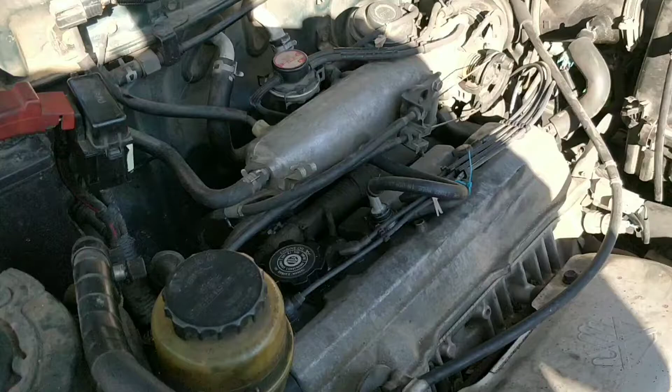Real quick, this car's gone a lot of miles and years ever since I changed the timing belt. Previous to that, because of the other problem it had, I've just had no power—no power up hills, no power down hills, and no power in the accelerator. You got like the first quarter inch, and that's all the noticeable power you have when pressing down the accelerator. Everything else you push down was just going in order to engage the transmission to downshift it.

So I don't really know how to explain it—just no power anywhere. And my cruise control is really wonky too. I'd engage it, sometimes even after my fix on the timing belt. Even on this last trip, before my alternator went out on me, I was having issues. I'd put the cruise control on and the car would floor itself. Other times I'd put it on and it would go down halfway and I wouldn't have any power. I don't know, it's just really hard to explain, but just no power at all in the engine.

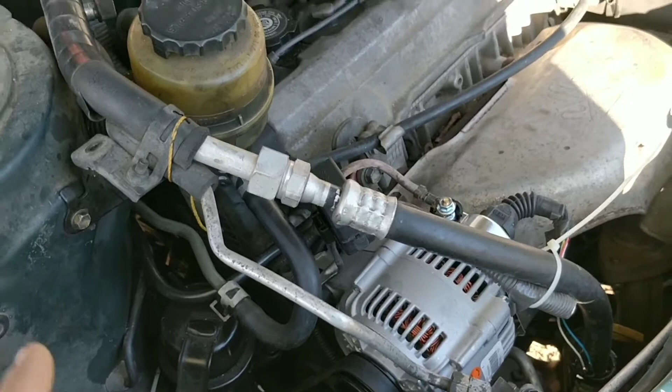So some things I want to go over so I don't forget. Like the timing belt—one of the common problems with people replacing their timing belt, and you'll see people mention it, this is what happened to me 150,000 miles ago, was I was a half tooth off. You get your timing belt back on, trying to put it back on the pulleys and everything, and then you're a half tooth out of whack. I had to make a decision on whether to go left or right to make it sit correctly, and I went the wrong direction, which ultimately put my crankshaft one tooth off, which made everything 15 degrees out of time, or at least down at the crankshaft it was 15 degrees.

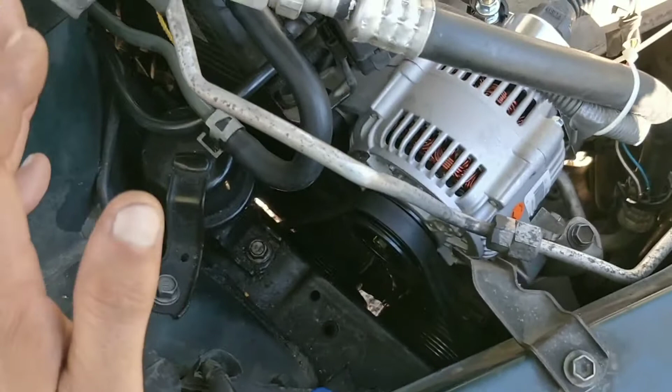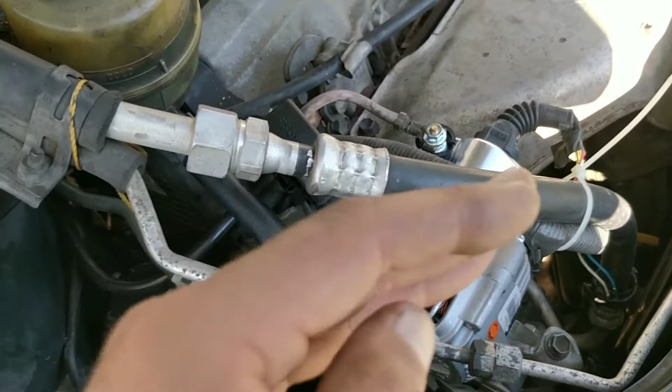Another thing—mark your belt. You'll need to get a Q-tip, cut off the cotton swab end, dip it in some paint, and touch the belt on each side of the tooth, and then touch the tooth, so you'll have 3 dots, and that way you've got your original position. Of course you do all that on the camshaft pulley. Then the crankshaft pulley, down there, has a little V notch on the back side. And on the timing belt cover, on the lower cover, there's 0, 5, 10, 15 degree marks, and on the other side there's a 45 degree mark.

What else is there? I guess that's it. If I think of anything else, I'll mention it. All right, so to check your timing—I don't know if a timing light will work. You check it and point it down here, where you can see little things and the light would flash. But as soon as you start your car, the computer puts it out of time, so I don't really know if a timing light would work on that.

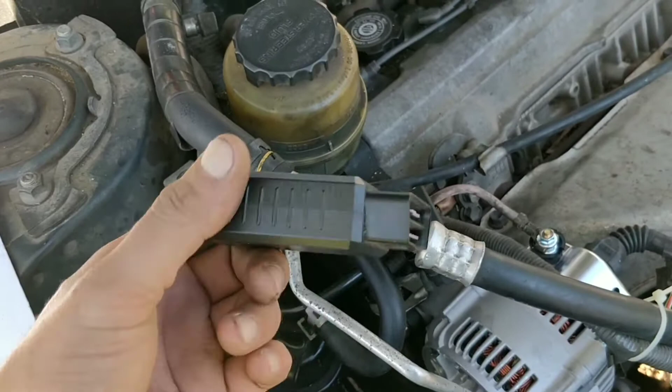Or maybe you can get one of these—I got one of these. It's 15 bucks, I've had it for years, and it's just awesome. You plug it in and you can see everything going on with your engine, and also whether it's advancing or retarding the timing, and how far out of time it is. So maybe you need one of these with the app to see where it's at, then go down there with the timing light to make it flash, and maybe they'll line up. I don't really know, but the way I did it, everything was already taken apart since I was changing out my timing belt preventatively this time instead of waiting on it to break.

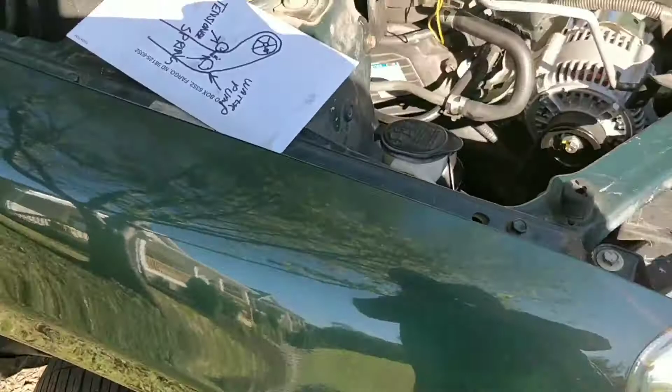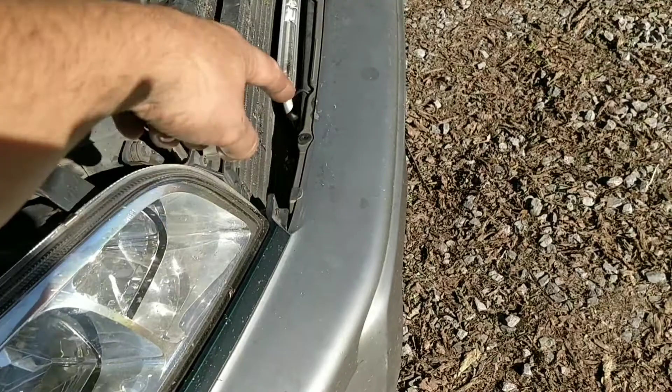Well, screw it, let's just get into it. So you jack up your car, take off your tire, and there's plastic skirting that goes around to protect everything. There's 2 ten millimeters here, and I believe 4, maybe 5 ten millimeters there, and one goes in at the end. In the middle there's like 2 bolts. That'll take it off and expose the crankshaft.

You'll need a breaker bar or a ratchet with a cheater bar, especially if you're doing it alone. You'll need an extension on it because you'll have to use your foot, and a 19 millimeter wrench. Everything else is 10 millimeter and 14 millimeter. Once you get your tire off and stuff, you come over here and take off this reservoir, and you need to get your power steering pump out of the way.

There's 2 bolts, one here and one here, and that'll loosen that up. I didn't do this, but I wish I had, because it was such a pain and it was so messy. Then you follow this around, and there's 2 more bolts - whenever you see how hard it is to get to those, you'll understand why I didn't do it. You take those off, and that'll just lift off and flap out of the way. What I did was disconnect it here, leave this here in the way, and take zip ties and plastic, but it was constantly dripping because of gravity. This thing has air holes in it, so it's always wanting to drip. So you got that out of the way.

Next thing you need to get out of the way is your engine mount. There's 3 bolts on the damper right here, one here and one on the other side. You'll get that off, and then on your engine mount itself there's a bolt on this side, a nut on this side. You'll take those off, and underneath in the middle there's another one. Once you get that off, your engine is completely disengaged from the car on this side.

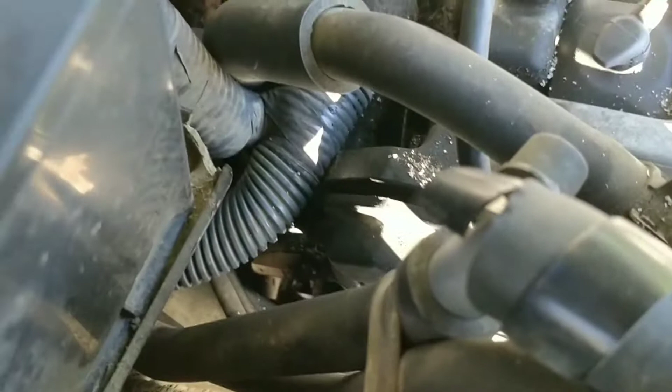Then on this side - where's that? You can kind of see it right down there, there's a 10 millimeter bolt. And then the last one, you go on around and down, and where the engine mounts are, you sit your hand in - it's like a 1.5 inch recess. You put your hand in and feel around, and you can feel that last bolt. So you get those off.

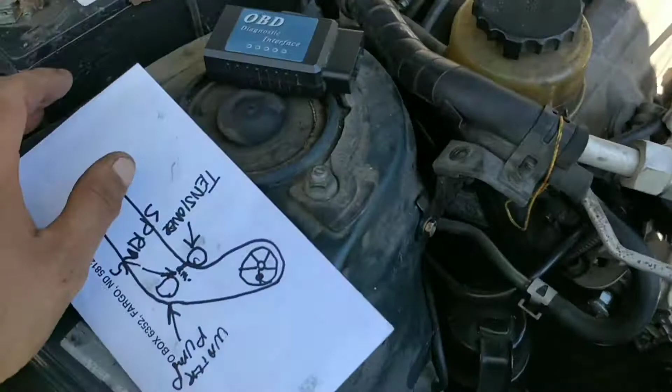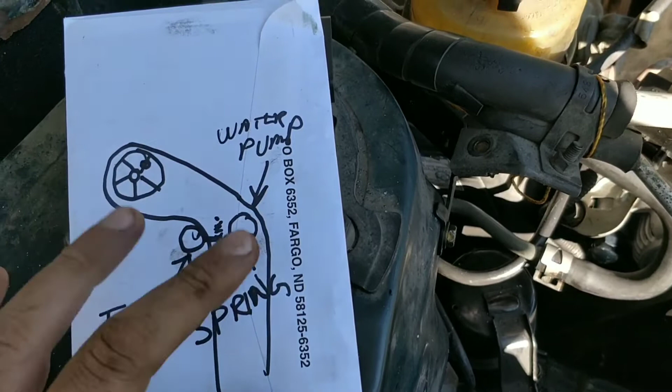And once you get those off, that'll explain this - my awesome, artistic drawing here. You've got the camshaft pulley here, water pump here, your tensioner, and the spring. Then down here there's a couple more pulleys and stuff, and then your crankshaft. It's really important that you never let the slack off of the bottom, okay?

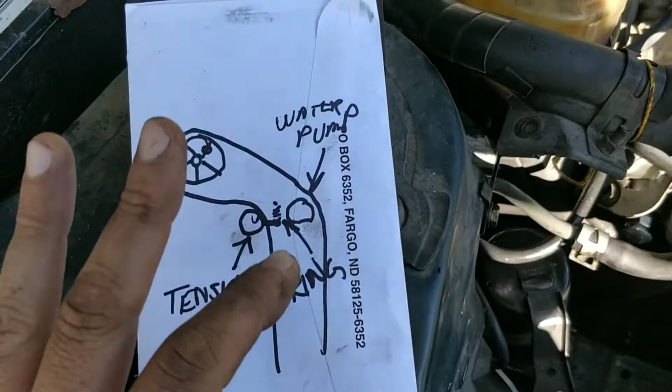So, first let's talk about timing. You put your crankshaft on top dead center. It takes 2 rotations of your crank to turn your cam once. There's a little hole in the sprocket, and on the engine they stamped a square in there, stamped into the engine. So you'll need to stick something in that hole to find it.

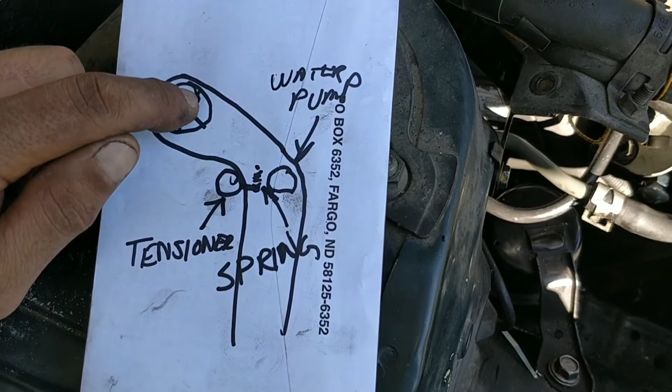Now, top dead center, just so you know, is go up 90 degrees and then back about 5 or 10 degrees, and that's where that notch is. So you need this hole to actually be over here, and when it's there, you should be in good shape.

Put your crank on 0, have your hole up here, put your drill bit in the hole and press in, and then either use your foot with the cheater bar on the crankshaft, or get another pair of hands in there so they can spin it. You'll want to spin it 10, 15 degrees each direction, and then you'll find that little notch - when you do, you know your cam's at top dead center, okay?

So then once your cam's at top dead center, look at your crank and make sure that little notch in the pulley is sitting at 0. Mine, from where I was off, was sitting at 15. So yeah, I screwed myself for a long time.

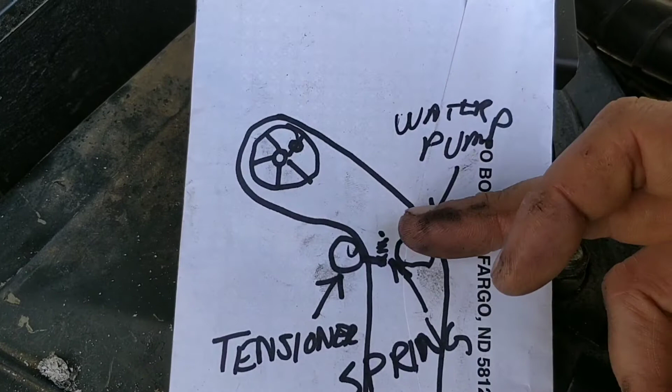And that's it. Let me swap hands here - you go and hold your hand here, okay? Before you let off your tensioner, you hold your hand with the belt on the water pump. Don't ever let this move, okay? And you'll also need to be holding it on this side - another reason to have another person.

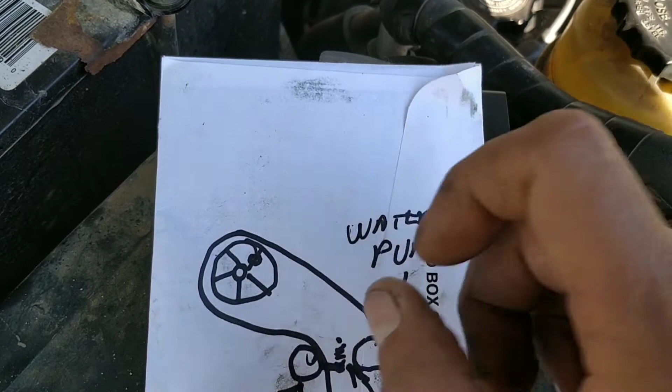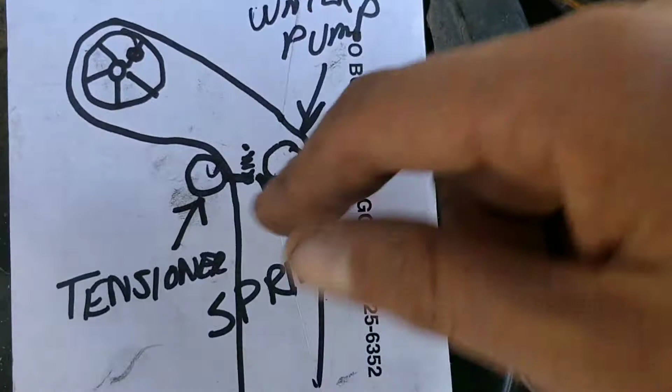You'll also need to be holding it on this side because you don't want to let the tension go down here. So you'll loosen this up, and then you'll take a screwdriver, push down, and then tighten. That'll hold this pulley down and give you all the slack you need.

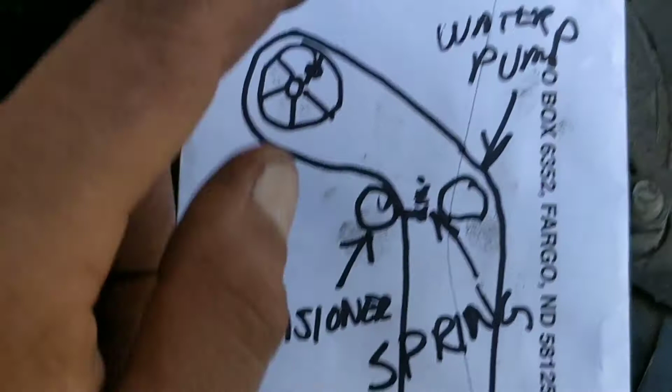I had to move and spin the belt this way one tooth, which gave me slack here. Once I had that, I ran my hand up the belt, pushing up against it, which gave me slack going around. And then I set my tooth where it needed to be.

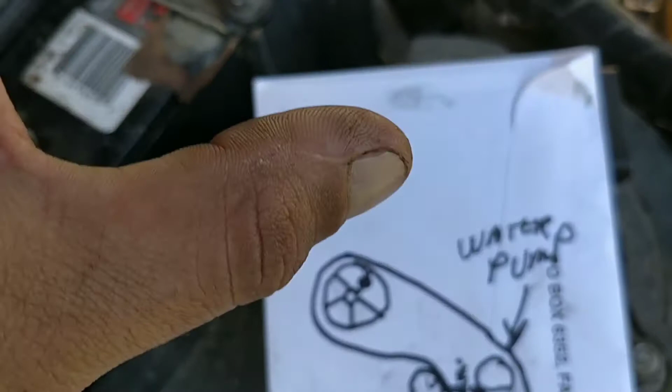And then what did I do? I went down to the crankshaft and spun it clockwise in order to tighten up the slack out of here. I let go of the tensioner, that sprung it back up, and then I put probably 5 pounds of pressure on it, and tightened that down.

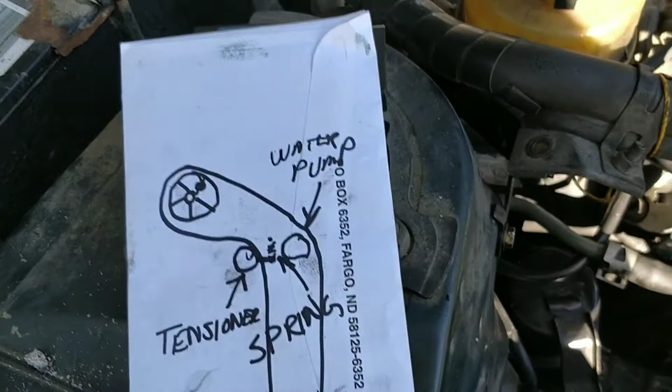I don't know if that's what you're supposed to do or not, but that's what I did. I just got back from a 2,500 mile trip the day after doing my timing belt, and it worked just fine. Then I just put everything back together.

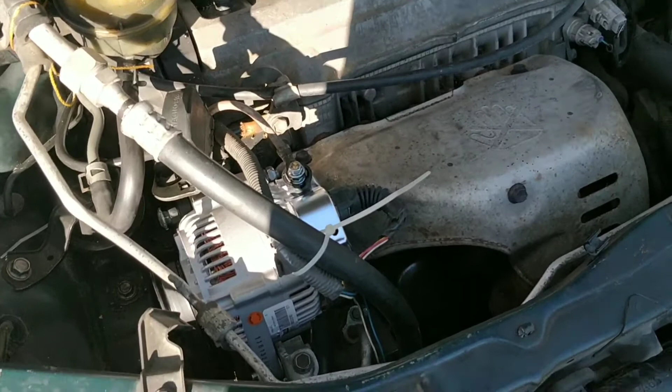That increased my power a lot, like I was saying. I did almost everything. I thought my car was fixed, but then on the road, once I got into the Kansas area, the rolling hills, that's when I realized my alternator was still screwing me over and was still causing me to lose power.

So luckily, I'm just so glad my alternator busted on me and broke on me, because that made me replace it, and then all of a sudden I had all the power that I needed.

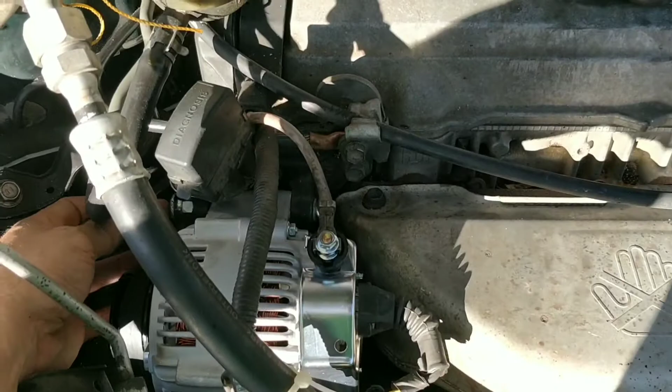So how do you check to see easily if this is the problem? Well, one thing you can do is mess with this bolt right here, unscrew it and screw it back in, try and increase the ground.

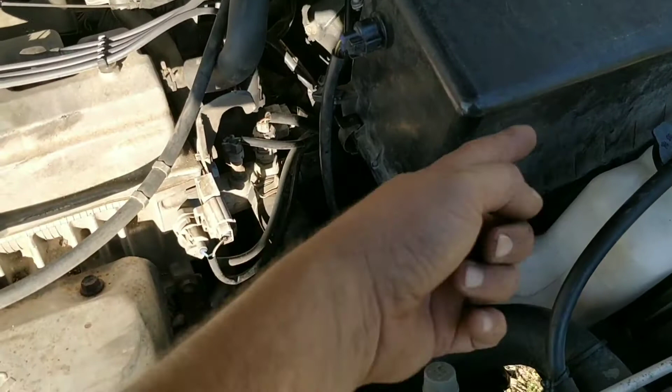I put in a ground over there, I put a ground in here. I cleaned the throttle body grounds. I cleaned the ground on the transmission down there, which is, just so you know, on top of the transmission right down there, and then it shoots straight over underneath the air box. I took off my coils, cleaned those contacts up, and then put them back in so they'd make better contact with the block and get proper grounds.

Every single time I messed with the grounds, I also changed these fuses, and don't forget to disconnect your battery first. Every single time I did something, I would get a noticeable increase in power. The problem is it always ended up going back, and then I'd get my power again, and then it'd go back out. It just sucked. But at any rate, when I replaced that alternator, it was all fixed, all done.

So I hope this helps. I hope you don't have to go through what I've had to go through for so many years. And with these old cars, the electronics are getting old, and they just require some extra little things that you got to do in order to get things beefed up.

The last thing I'm gonna mention, I haven't had to go over any really high mountains like Utah, Colorado, those areas where you get up to 14,000, 15,000 feet. When I'd be in those areas, I would always end up going like 40 miles an hour in second gear, going up hills, just in order to hold myself to be able to creep up a hill.

Then I'd top the hill, and I would have to keep it floored, and I still wouldn't be increasing speed. Then I'd be turning off the ignition, slamming on the accelerator repeatedly, hitting the little ECT power transmission button you got. I'd do everything to try and get my power back, and finally I would end up getting my power back.